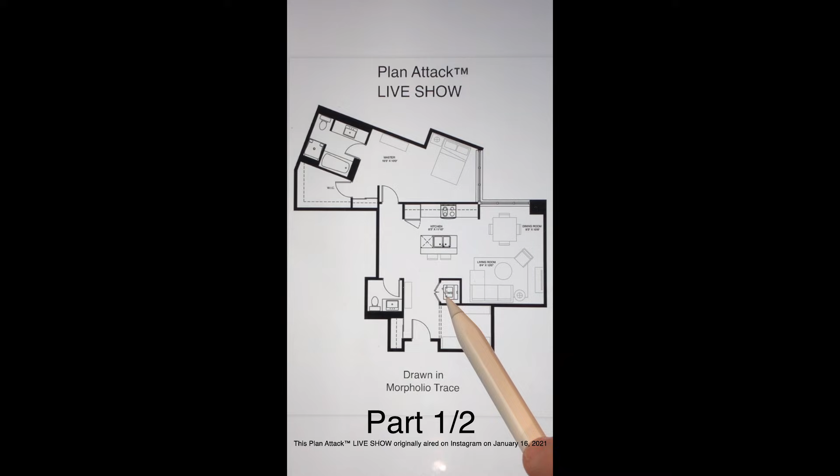Ivory Coast, 4pm. Nice. I really appreciate you guys all coming.

We had such a good time yesterday on this plan, and we're going to do the same thing again today. I have a little bit of an alternate ending set up for today's show. If you came to yesterday's show, I got some feedback from everybody yesterday, and we're going to adapt it into the show today.

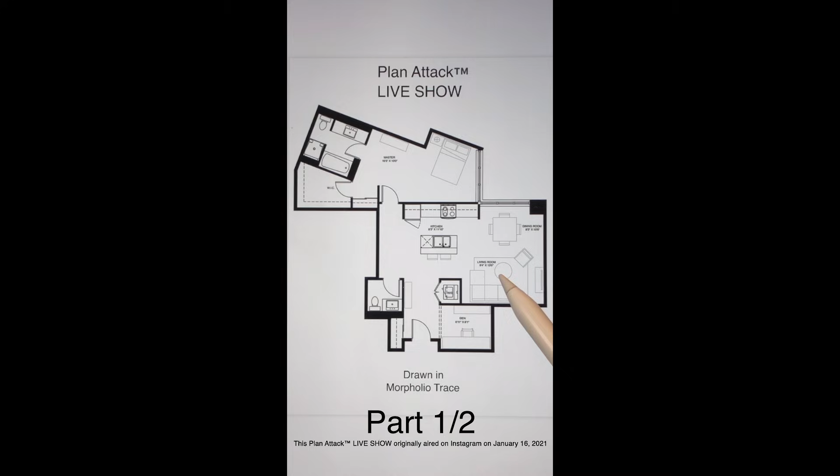Spain, hello. Nice. Germany. Lebanon. Oh, you guys, this is awesome. Okay, this is so great to have everybody here.

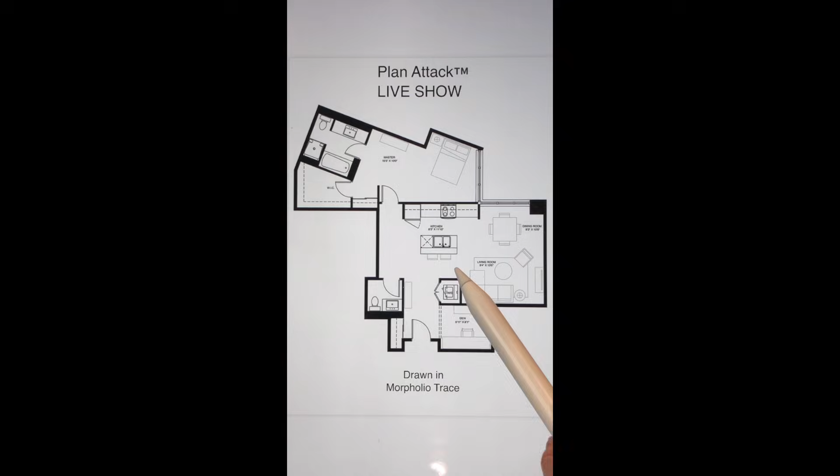I'd like to start by having a look at the plan together, and talk about what some of the big problems are with this plan. We looked at it as a group, we've looked at it in the reels, and I've had comments about it. I sort of said it's got a dinner plate size shower, and there's a view of the toilet, but I want to talk about some of the problems.

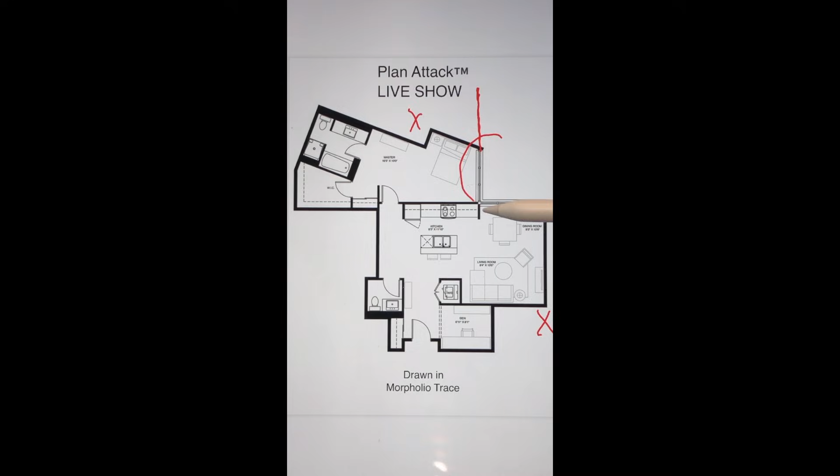One of the biggest problems with this plan is what I call, and what another viewer called, an armpit floor plan. It's actually in an inside corner of the building, so there's another unit here and another unit here, and the only windows in the plan are in the upper right corner. This is a 900 square foot, 1 bedroom plus den apartment unit in Toronto, 83 square meters. It's a very, very big unit for only having 1 bedroom, but the reason is because it's this armpit, like the inside of your arm, and the only windows are here.

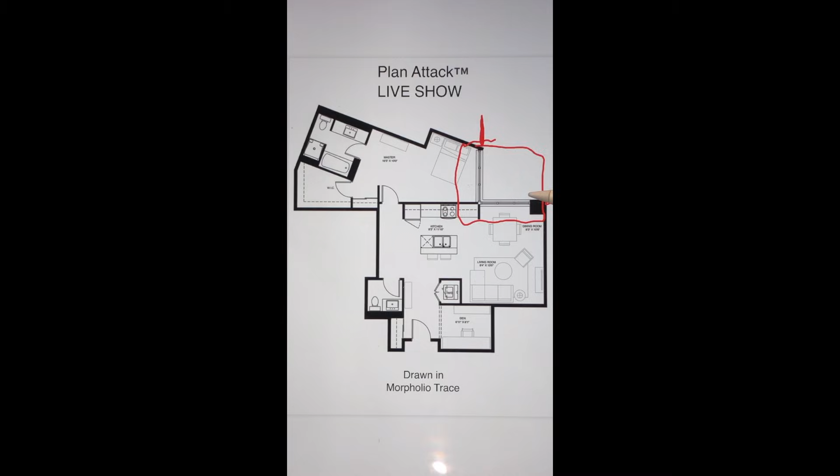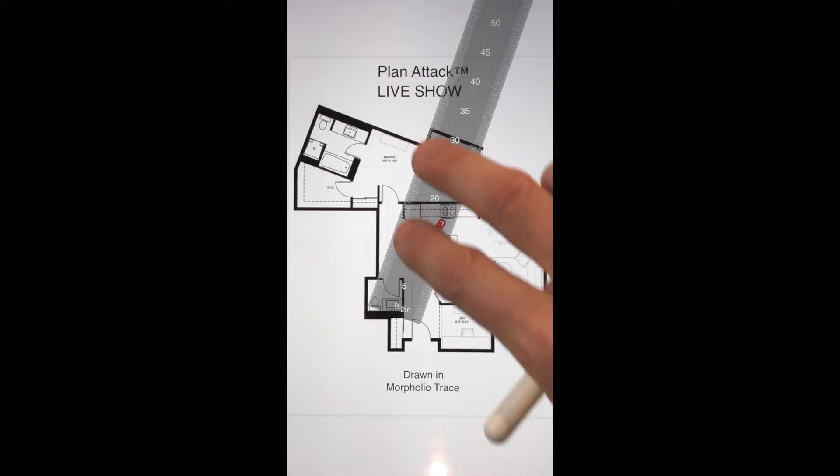So that has its own challenges for the layout. I also pointed out, if you're in the kitchen—this is me in the kitchen—one of the biggest issues is you have a direct view of the toilet from the work area of the kitchen, which is a big no-no. When designing floor plans, we have to take our ruler and draw a line to make sure we do not have a line of sight to the toilet from the kitchen or dining. That's a big rule I have here at Plan Attack.

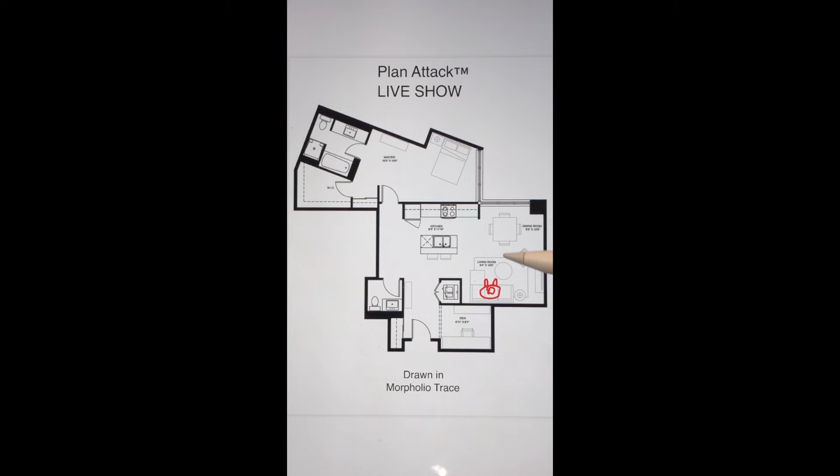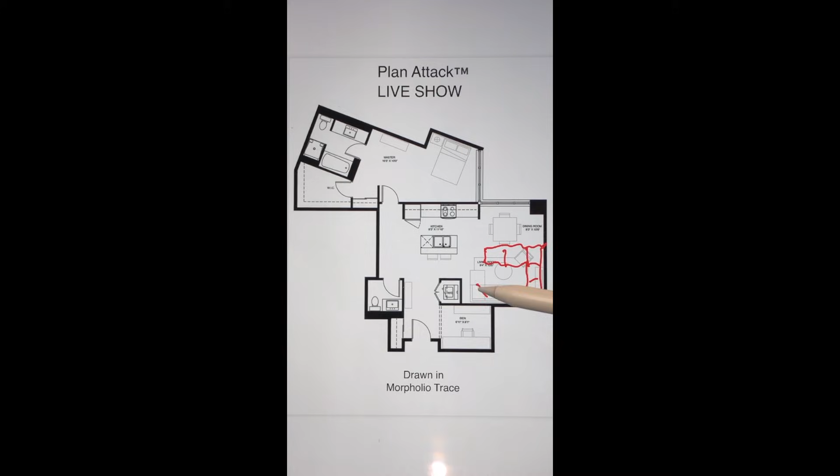One of the other issues has to do with the living and dining space. If I'm on the couch here, I have a really great view out, which is awesome, but the TV is kind of off to the side—it doesn't make a lot of sense for the layout. If we changed the furniture layout and turned the sofa the other way, put the TV here, that's not a bad way to do it. The problem is we don't have enough room for a dining table. So this living-dining space, in its configuration, really doesn't have enough room for both the living room and the dining room. It's a bit of a problem.

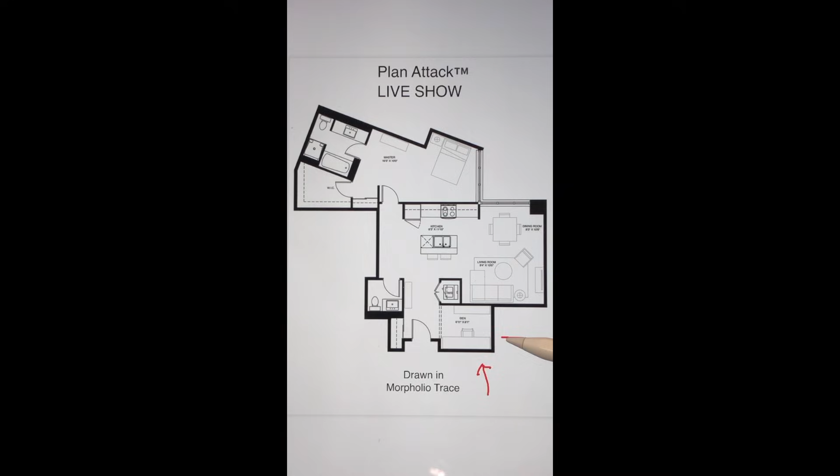What do you guys think about the den? This is marketed as a 1 bedroom plus den, so this is the office space here. What do you think about the office space—do you think this would be a great place to work? Somebody's saying air and light. Yeah, there's an issue overall with air and light because there's not very many windows.

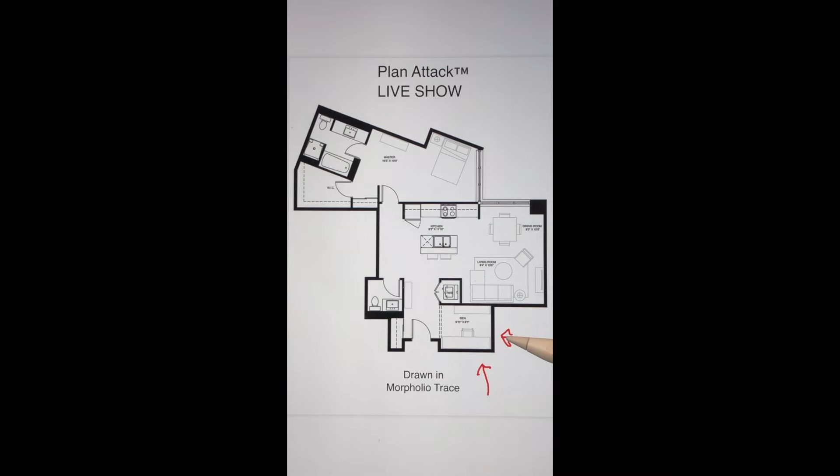The den is not good. Everybody's saying no, no, no. What is the problem with having the office right here? There are a few issues. One is that there is absolutely no access to any daylighting - you are really in a dark closet. This is really a problem. The other issue with the den location is it's immediately at the front door. I'll go crazy if I work there - I'm going crazy just looking at it in the plan and I'm not even working in there. You might as well be sitting in the fire exit. It's just not a good place to sit. You're really going to feel like you're underground - you're not part of the unit. So that is a problem.

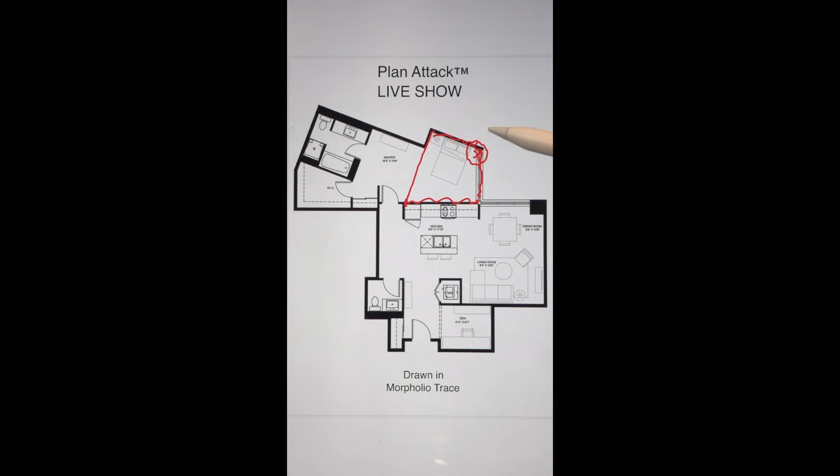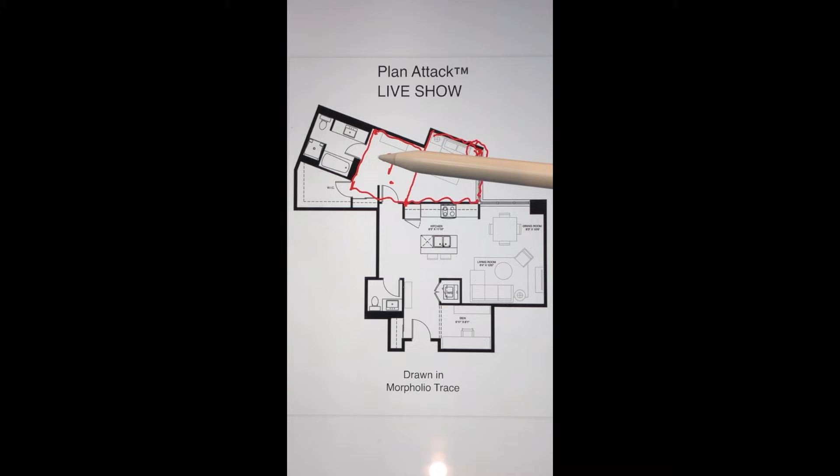So one of the other issues - let's look at what's going on up here in the bedroom. This is one of the strangest decisions anybody has ever made, because if you look at the size of the bedroom where the bed is, it's angled, and they don't even have enough room for the second night table, which makes no sense. But what is this space? What is actually this area here? That is wasted space, and it is almost the same size as the bedroom, but all it has in it is one dresser. It makes no sense - it's basically a giant hallway to get into the bathroom and the walk-in closet, and it makes absolutely no sense.

Speaking of the walk-in closet, I think it's too big - there's a lot of wasted floor space. And the bathroom, for the size of the unit, feels really cramped with this tiny shower. So we have our work cut out for us, don't we?

Yes. Hi, everybody. All right.

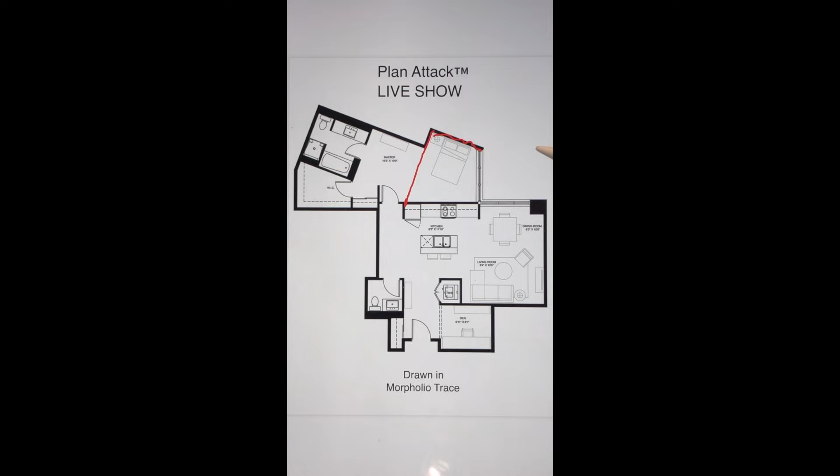Let's get down to business and fix this plan together and look at what we can do. So the first thing I'm going to do is demolish it - what do we think about that? I've left the powder room as it is, but we're obviously going to change the entry area, and I've left the front closet. What do we think about the plan the way it looks right now?

It looks much better already. Just opening it up is really interesting - once you take everything out, because it looked really poor before, and now all of a sudden, I have to say it looks actually pretty good.

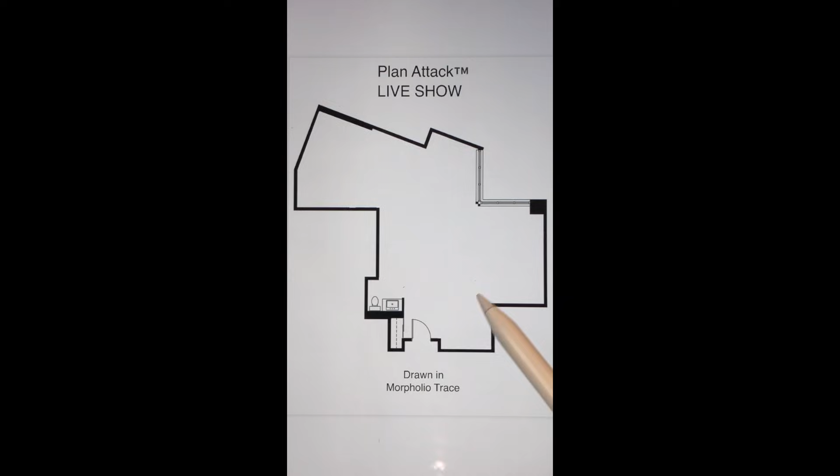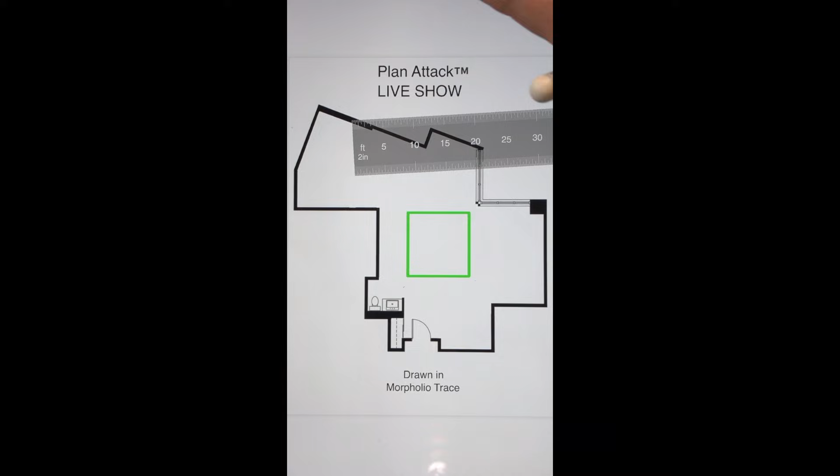So I want to talk about a strategy to fix this plan and show you the way that I think about fixing the plan. It really has to do with where we locate the bedroom. This is the bedroom - this is the size of a bedroom, about 10 feet by maybe 10'6", that's about 3 meters by 3 meters. That's about how much room we need for a good sized bedroom.

There are two options for where we could put the bedroom. We could put it here in front of these windows, or we could put it here - those are really the only two options for this plan, because the bedroom has to have a window. We can't make the bedroom back here - it has to be by one of the windows because it needs egress.

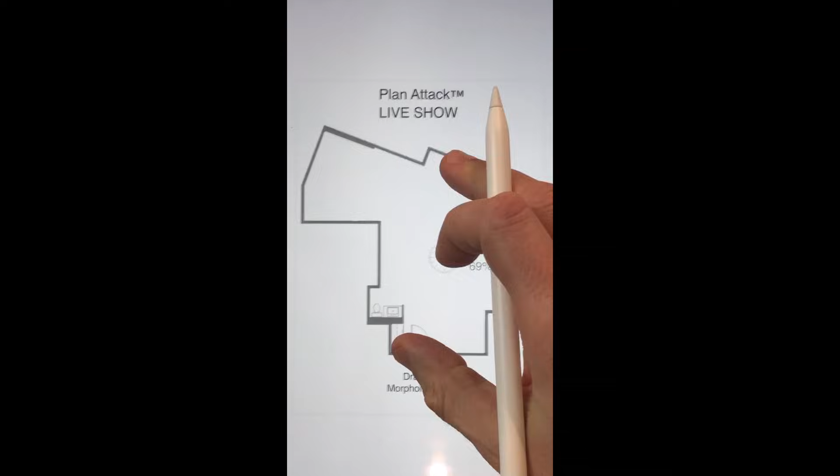So there are two options - there is A and there is B. I want you guys to think about this for a minute and tell me where you think the bedroom should go. Should the bedroom go in A or should it go in B? I'd like you to type in your answer right now. Think about it - there's only really two options, A or B. Where should the bedroom go?

I'm going to talk you through both ideas, but I want to see a vote. A lot of you are voting for B. I'm seeing lots of B's, a couple A's, majority of B's.

There is a logic to why we would choose B, and it's very interesting, and I'm going to talk about it. A lot of you are saying A, but there's only a few A's, mostly B's. I'd say we're probably 90% B.

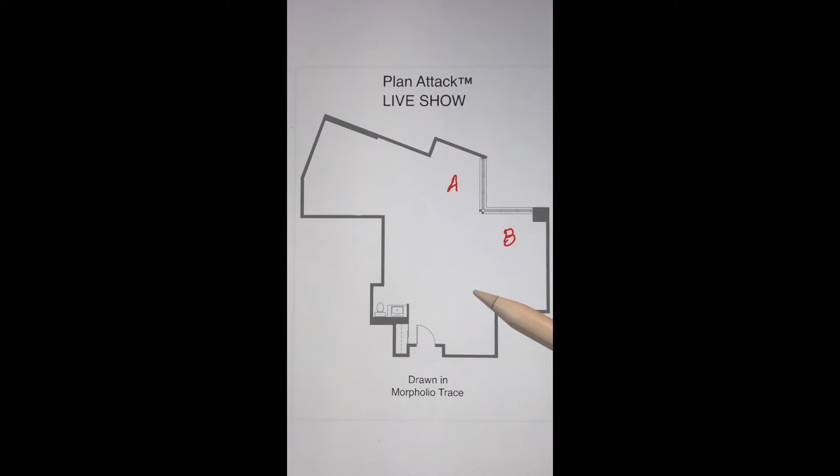A is where it was originally, B is where we could move it to. Oh, there's now some more A's. People are interesting. I'm going to tell you why I think it actually should be B, and discuss why.

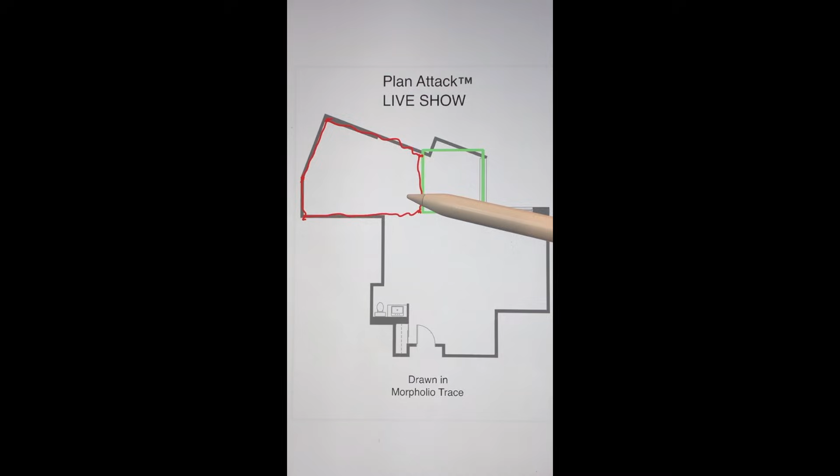So the first thing I'm going to do, let's talk about A and why I would not choose it. If that's where the bedroom goes in A, then the rest of this space would become the ensuite and the walk-in closet. You can't really have your kitchen or living space around this tight corner, so it has to be the service related to the bedroom. In a 900 square foot unit, what do you think about the size of this for the ensuite and walk-in closet?

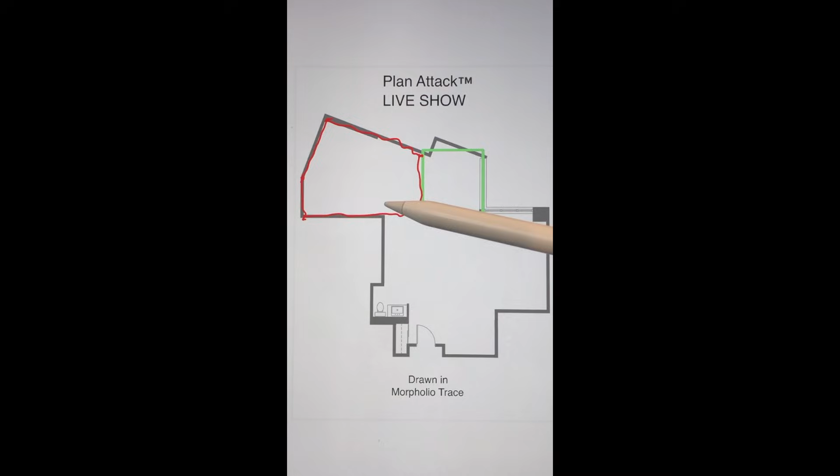It's very interesting. I think this is too big to have the ensuite and walk-in closet. That's kind of the challenge and problem we had with the original plan, too much space here for the ensuite and walk-in closet. It just didn't work very well in terms of proportion.

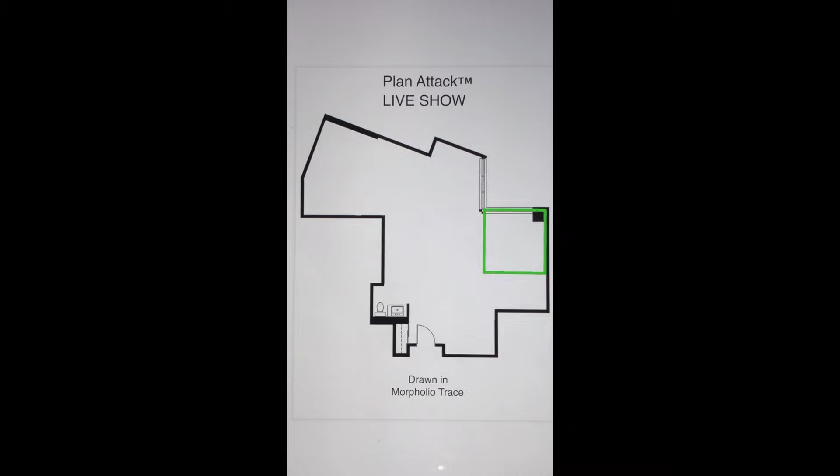Now, if we move the bedroom to the B location, we have an area approximately like this that could be the ensuite and walk-in closet. What do we think about this in terms of size? Because you would come into the unit, and this would all be living, dining, kitchen space. What do we think about this?

I think it is interesting. Oh, someone's telling someone else to be quiet. That's kind of interesting. Please be quiet, all through text.

Yes, I think it's more reasonable. People are saying more reasonable. People are asking for directions and the north arrow. I have to look at the key plan to tell you that, but I will try to look at that. I think it's very interesting.

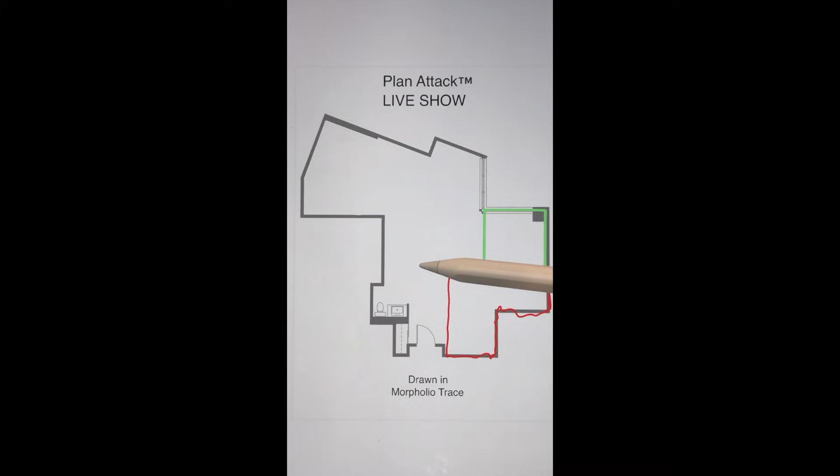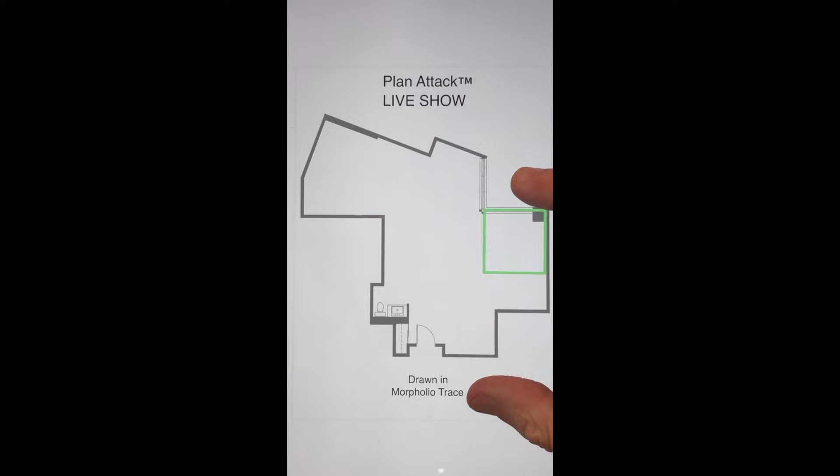I think this is a more reasonable size, and if we look at how big the living, dining, and kitchen space would be, I think that is actually more reasonable. I also think it's better to have the eccentric angles in the living, dining, kitchen space as opposed to in the bedroom space. So that is going to be my vote, the bedroom in the B location, and that is how we develop the floor plan to fix this.

I do want to show you a little bit of what I've done, because I've done some work in advance where I've taken that idea and created a sort of plan with some of these ideas. Let's talk about this a bit, and then we're going to work together on the living, dining, kitchen space.

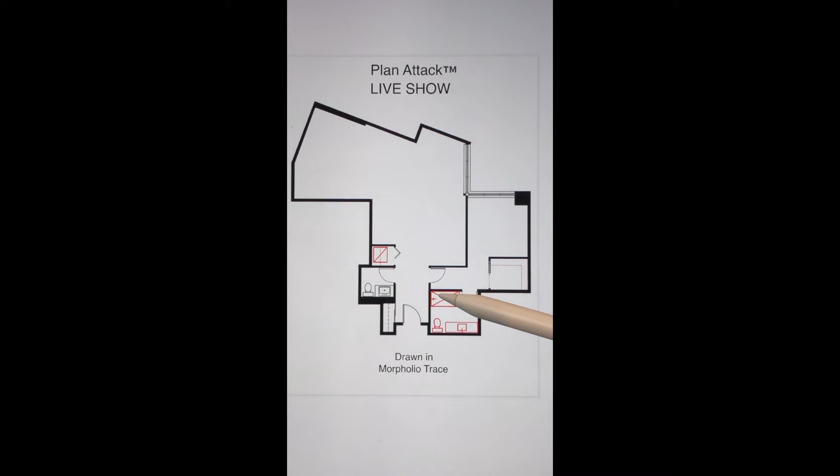Okay, so you come into the front door. I left the front door as it is, and the closet. I moved the location of the powder room door, so it is off of this hall. Now this is a nice wide entry hall. I aligned these two doors, so they are actually aligned with each other, which is very nice and symmetrical.

You come into this hallway zone, and then you go into the ensuite or into the closet, and that means the master bedroom is here. The proportion of all of this is much better. So what ends up happening is we have a very nice and continuous space for the living and dining with a big window.

So it actually works, I think, fairly well. The bathroom is still internal. Remember, the bathroom was up here before, but now it's back here.

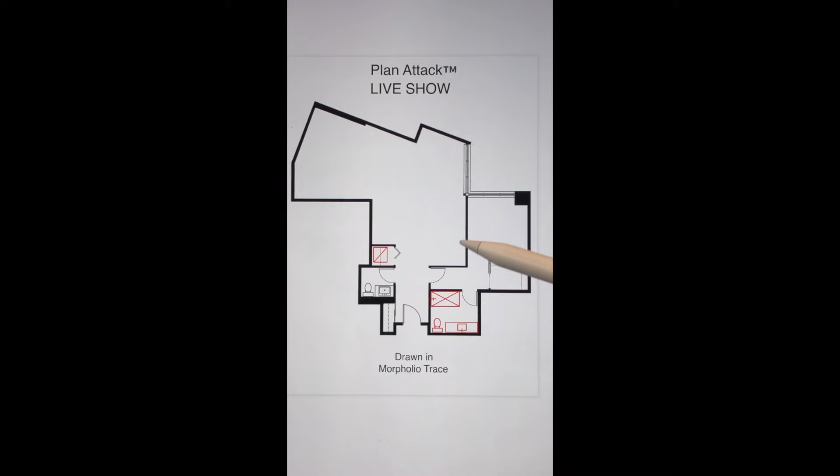I just want to point out that I'm imagining we are doing all of this work before the building is built. So the developer is coming to me saying, can you please optimize this floor plan before my building is built and make it better? So I'm not renovating this plan - I can move the plumbing and some stuff around, okay?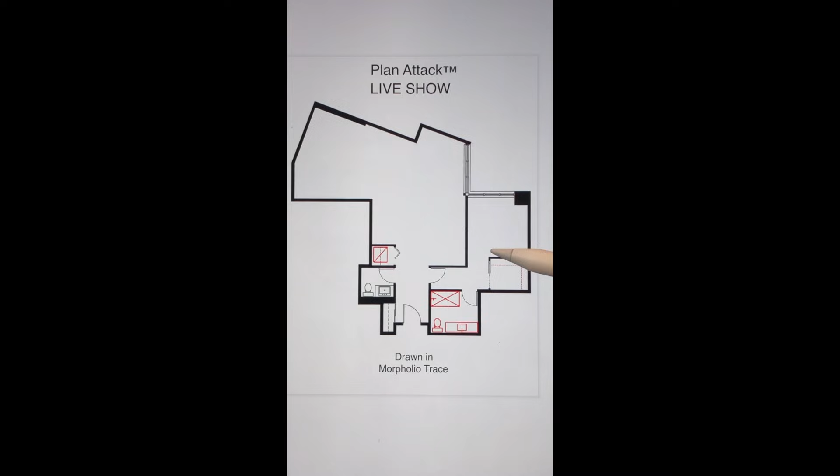So let's have a look at this. This is very interesting, because now we have a simple layout for the bedroom. The bedroom has now become a secondary space, which is the right thing to do in a 900 square foot unit. You don't want the bedroom to be the major space, which it was in the previous plan. Because if we all remember what it looked like before, right?

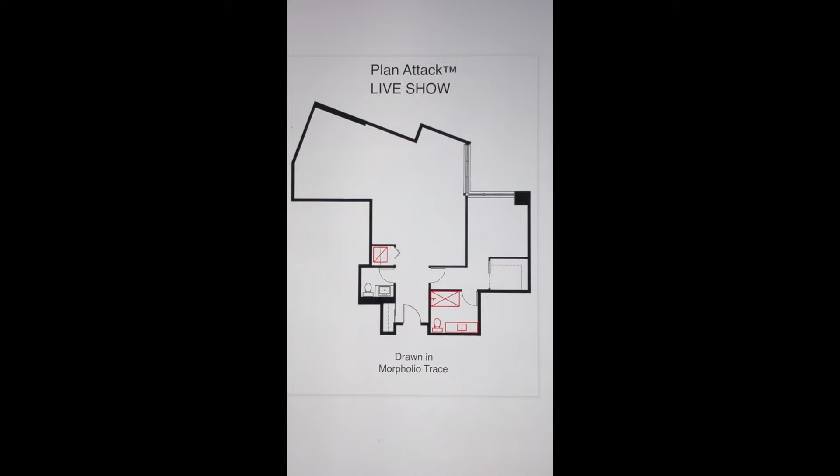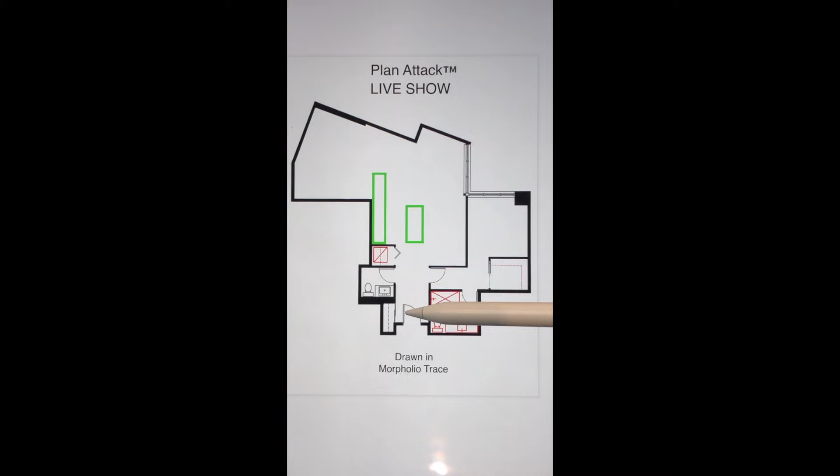So I do want to talk about the kitchen now, okay? This is the big second area - leave it open, yes, well, we have to put in a kitchen. There are kind of two options for where the kitchen would go. We know we can't really put the kitchen here, because if you walked in, you would smack into the island, and then this is kind of narrow for the dining space, making it really awkward. So we know that's not going to work - that is a big no-no.

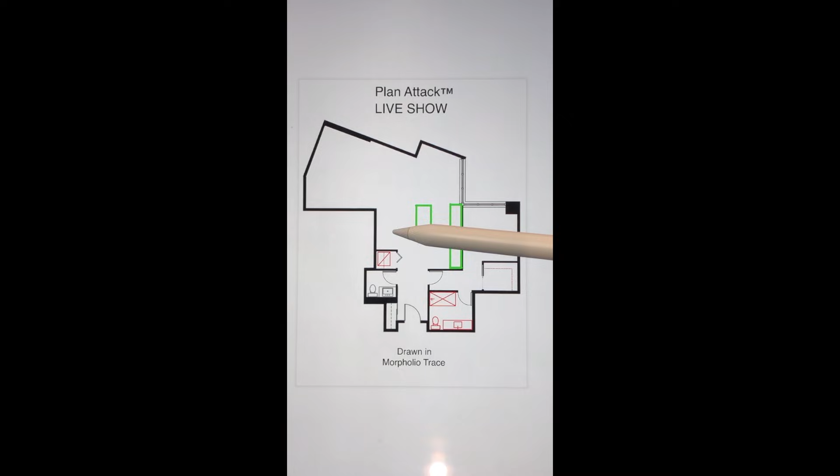We could, however, put the kitchen here. That would be one option, because you could walk in past the island, and then you could have a living dining space up here, and probably some extra storage here. You would walk in, past the island. So that is one option.

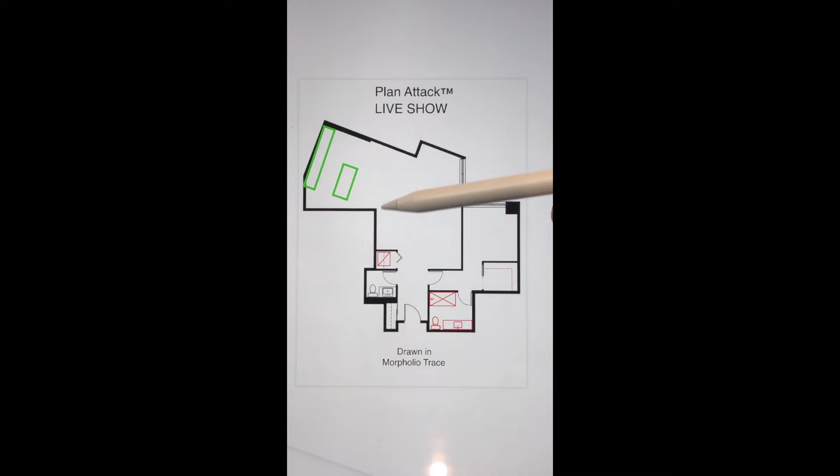The other option, I think, is we could put the kitchen here. We could design the kitchen so it worked better with the geometry, and have it here so you walk in and have a big living dining space, and the kitchen is around to the back, okay? So why not an L-shaped kitchen? Yeah, there's all sorts of ways we could detail the kitchen, but right now I'm talking about how we are going to place the kitchen.

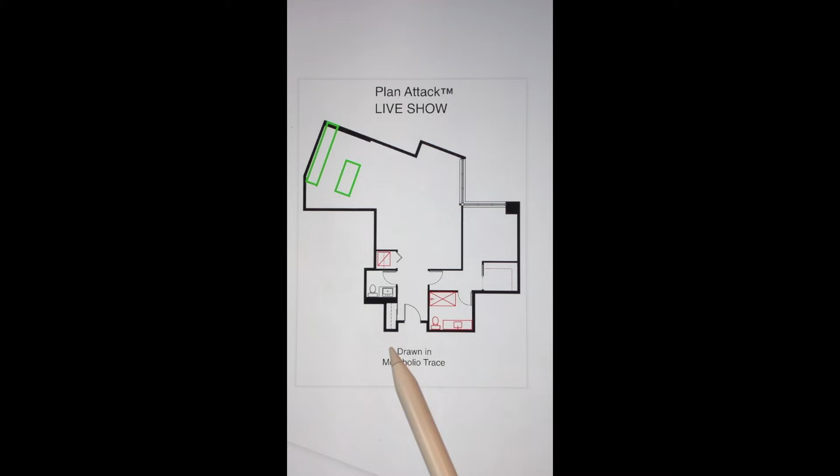So this is option A, and this is option B. I do want to talk about this, and I want you guys to tell me where should we place the kitchen? A or B? Should we put the kitchen up in the top left, or in the bottom right of the living space?

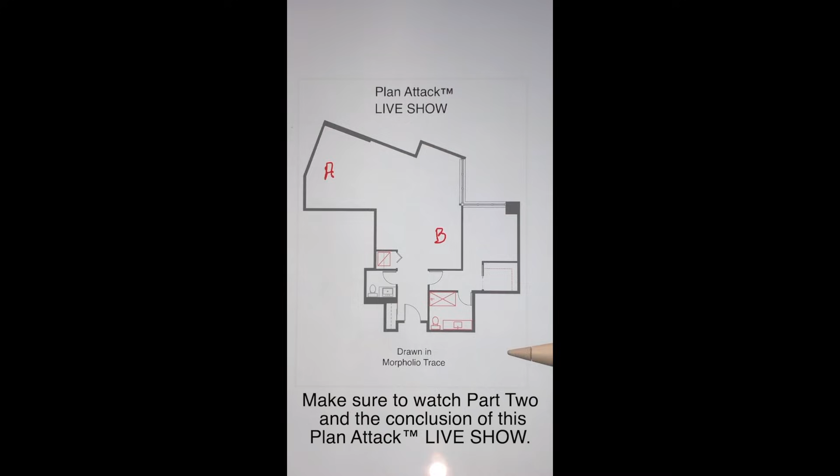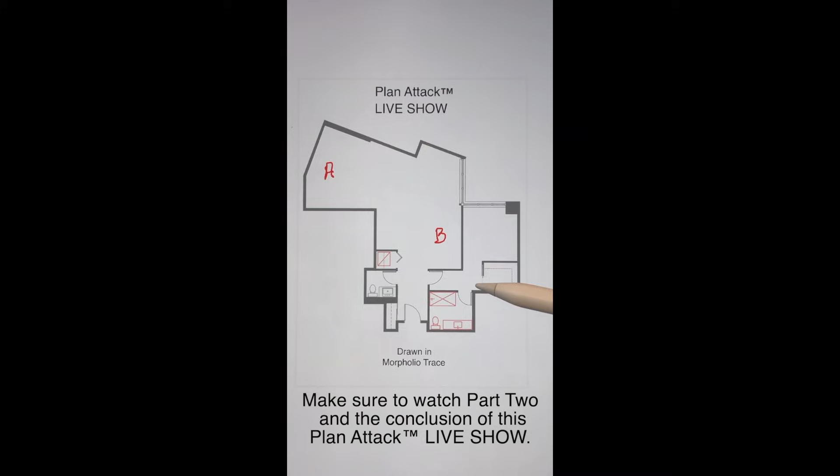Also, for the plumbing from the previous bath can be used for the kitchen drains - you are correct, that is a very smart and good idea. This is really interesting, A. Well, interesting - I'm going to count them, because I would like to do an alternate ending today. Yesterday we did B, but I'd like to see if we could do an A ending today, just for fun, just to make it different. And then at the end we're going to vote on it. B - I have an opinion about which one I think is better, but I'm very interested. So, somebody is suggesting C, and I'd like to know where the C option would be, because I'm also open to alternate ideas.